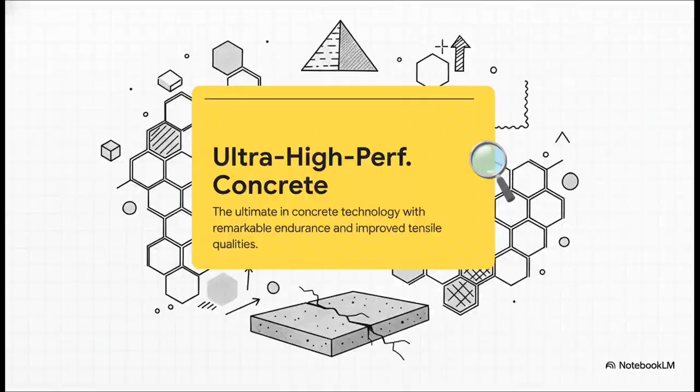At the very top of the pyramid, you've got ultra-high-performance concrete, or UHPC. You can basically think of this as the absolute pinnacle of concrete technology right now. And it's not just about strength. It's got this super dense microstructure and fiber reinforcement that gives it unbelievable durability. It even has the ability to hold itself together after it cracks. Wild, right?

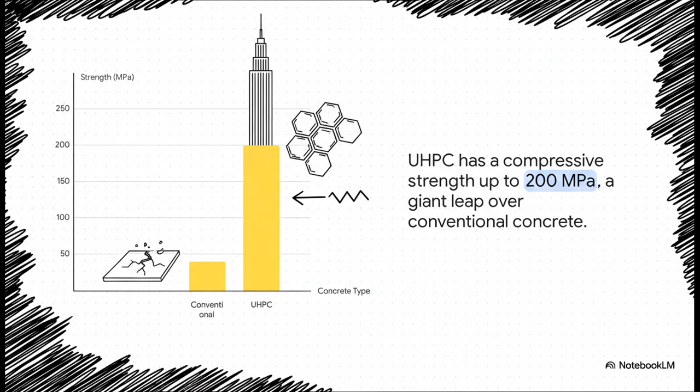Now check this out, because the scale of this improvement is just massive. The standard concrete in your sidewalk or in a building foundation, that might have a compressive strength of around, say, 30 to 40 megapascals. UHPC? It can get all the way up to 200 megapascals. That is not a small step up. It's a giant leap. It lets us do things like build impossibly thin bridges or skyscrapers that use way less bulky material.

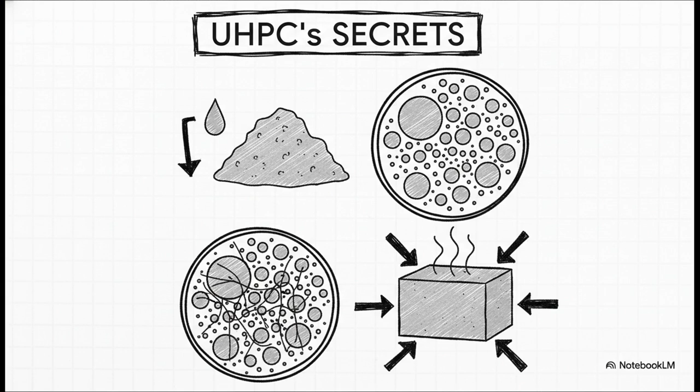So, you might be wondering, how is that even possible? Well, it's all about some brilliant material science. First, engineers use extremely little water, which is usually a weak point in regular concrete. Then they optimize the mix with particles of all different sizes, so there are basically no empty voids left. It's like a perfect 3D puzzle. Then they add tiny steel or synthetic fibers to hold it all together. And sometimes they even cure it with heat and pressure. Every single piece is fine-tuned for just maximum performance.

Now, building on that whole idea of fiber reinforcement, we have a cousin to UHPC, fiber reinforced concrete, or FRC. With this one, the main goal isn't just about peak strength. It's about changing how the concrete behaves when it fails. You see, those little short scattered fibers act like a web, holding the material together even after a crack starts. This is what keeps a tiny crack from turning into a catastrophic failure.

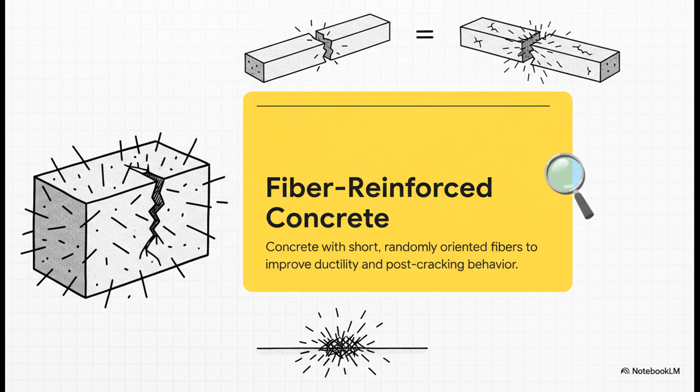Okay, so where is this actually useful? Well, think about anywhere you need a material that can bend instead of just snapping. Regular concrete is brittle. It just breaks. This stuff is way more ductile. It bends first. This makes it absolutely perfect for things like earthquake-resistant buildings, industrial floors that take a constant beating, and for lining tunnels.

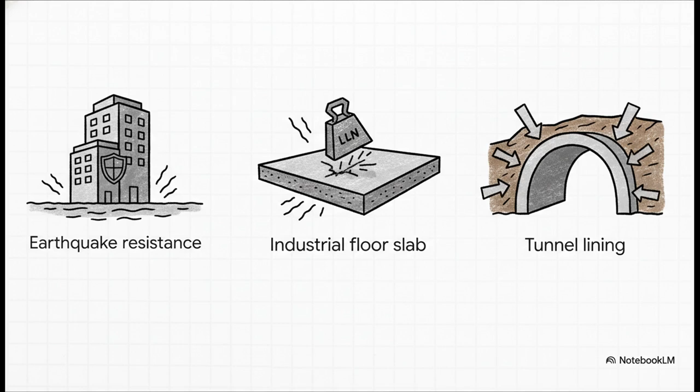FRC gives these structures the toughness they need to be safer and much more resilient. Strength is one thing, but what if you could actually change the construction process itself? This next category of superconcretes is all about flow, making it way easier to build really complex, intricate designs that were once nearly impossible. I want you to meet self-compacting concrete.

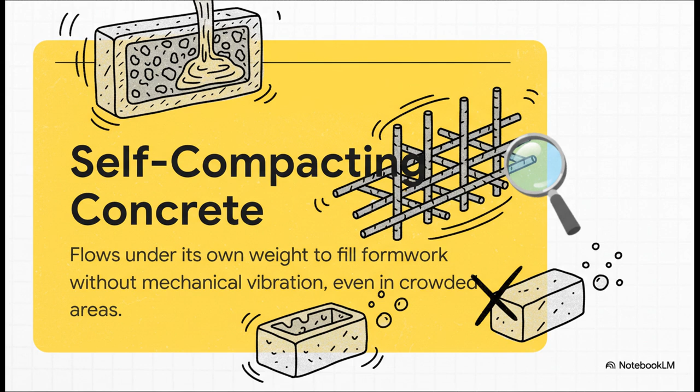The name really says it all. This stuff is so flowable, it pours like a thick syrup, filling every single nook and cranny of a complex mold or weaving around dense steel rebar all on its own. You don't need any of that noisy, labor-intensive mechanical vibration to get the air bubbles out. It just does the work for you.

But how do you control something that acts like a liquid but hardens like a solid? Well, through some really rigorous testing. Engineers use things like the slump flow test to see how far it spreads, the V-funnel to check its viscosity, and the L-box to make sure it can pass through tight spaces. So it's not just a wet mix, it's a precisely engineered material.

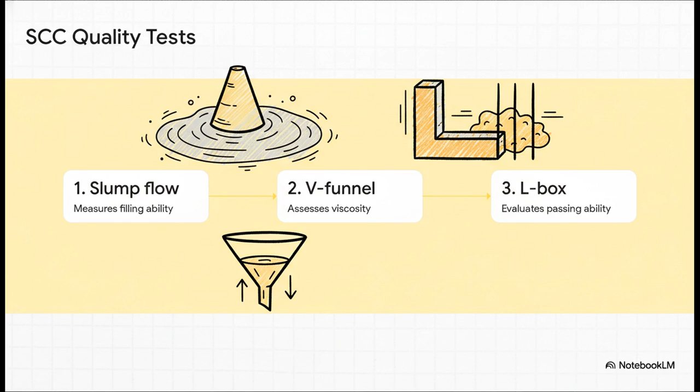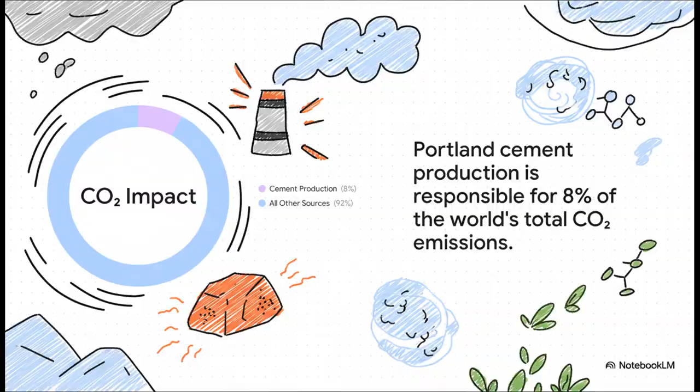And here it is, a truly radical solution: geopolymer concrete. This is a fundamental change in chemistry. Instead of using Portland cement, GPC uses industrial waste products, like fly ash from coal plants, and activates them with an alkaline solution to create a powerful binder. It completely sidesteps the traditional carbon-heavy process.

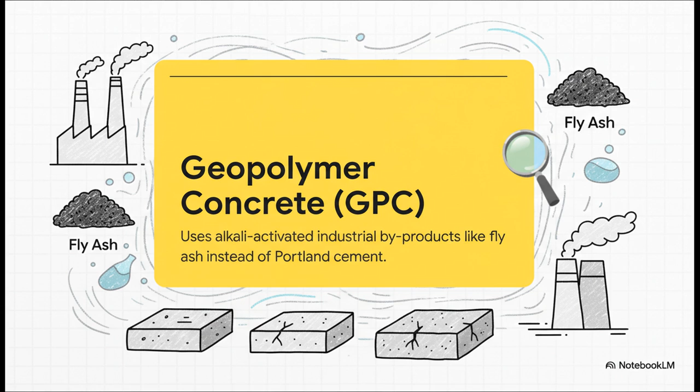So what's the bottom line? Geopolymer concrete can slash the carbon footprint of concrete by around 50%. And when we're talking about an industry responsible for 8% of all global emissions, a 50% cut isn't just an improvement, it is a potential game changer.

And you know what the best part is? It's not a compromise. Geopolymer concrete is a seriously high-performance material all on its own. It literally takes industrial waste and turns it into something incredibly valuable. It's often more durable and more resistant to chemicals and fire than regular concrete, and it hits impressive compressive strengths that are perfect for most construction jobs.

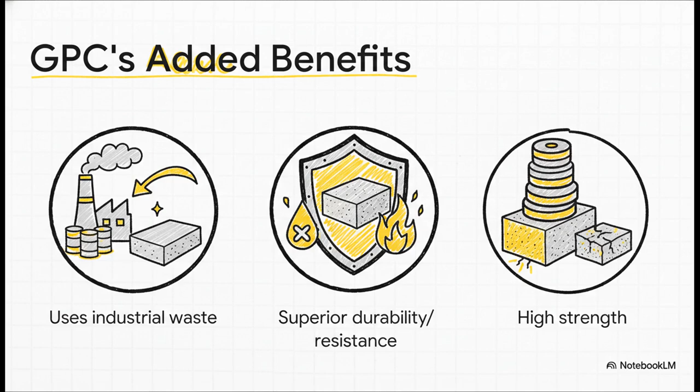So, we've got concrete that's ultra-strong, self-placing, and dramatically greener. I mean, the future of construction looks pretty bright. But if these materials are so revolutionary, why aren't they everywhere yet? Yeah, there are still some real-world hurdles to get over. For one, these advanced materials can be more expensive. And crucially, the standardized building codes and design guides that engineers have to follow haven't really caught up to the technology yet, and that slows down adoption.

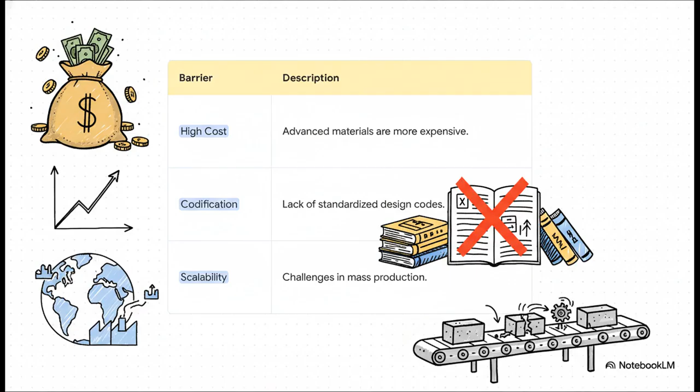And of course, scaling up the production of these specialized components to a global scale is a huge logistical challenge. But here's the thing, these are challenges of adoption, not of fundamental science. The potential is absolutely there. We are right on the verge of reinventing this ancient material. So I'll just leave you with this to think about. Our entire world as we know it was shaped by the limitations of conventional concrete. What kind of world are we going to build when those limits are gone?